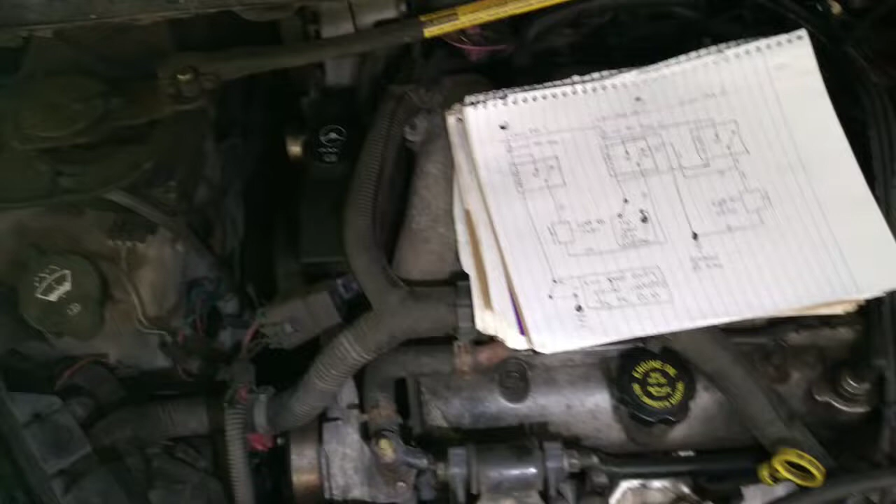Today I'm going to be going over the three relay cooling fans on a lot of GMs, some Fords, and even some Dodges. They use three relays: a main, and then two relays, one for each fan if it's a two fan system, to control the high and low speeds.

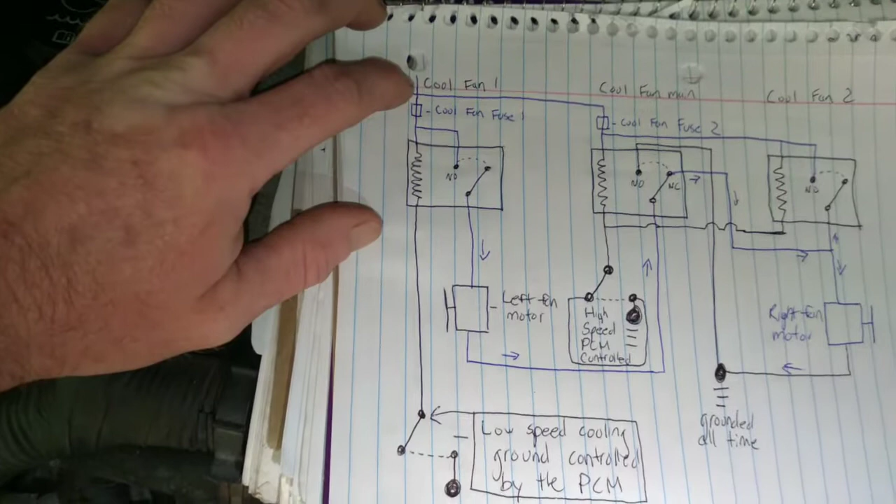I've actually drawn out a schematic about how this works, and I'm just going to be going over the low speed for right now, in case anybody has problems with that. I tried to draw all the positive up here in blue, and all of our grounds in black.

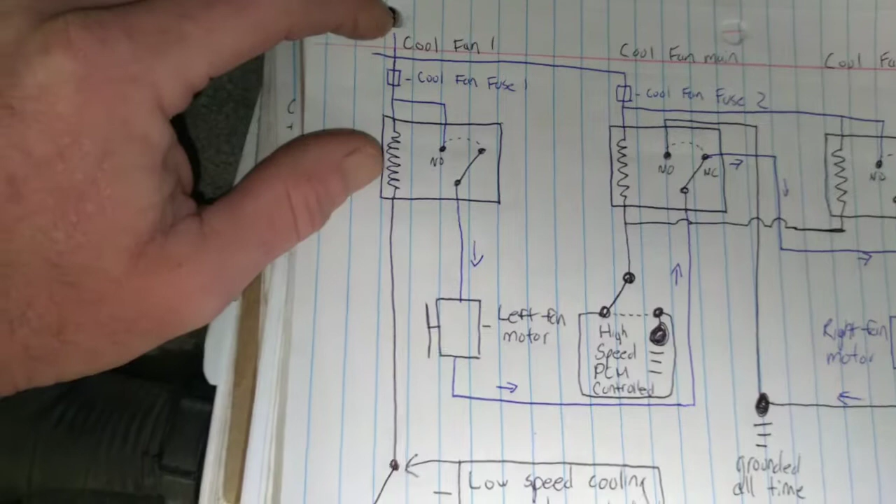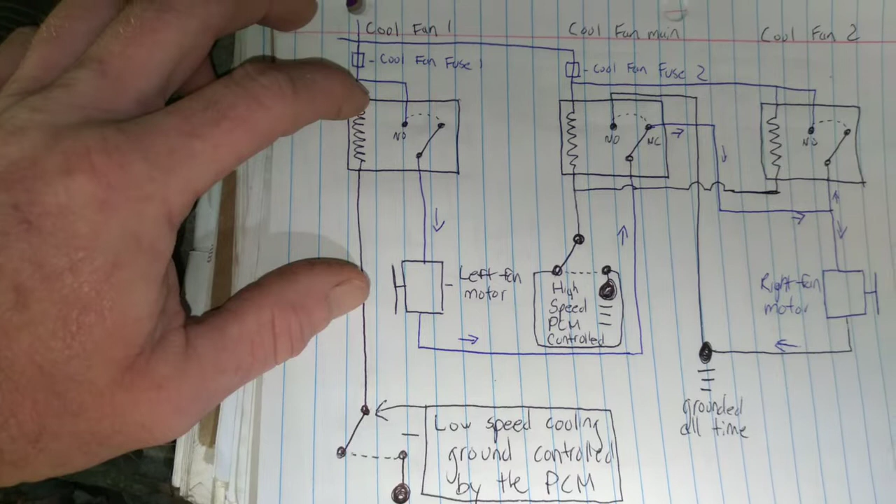I don't know how well it's showing up, but how this works is you got your power feed coming in, and it goes through two separate fuses. You'll have your cool fan fuse 1 and cool fan fuse 2. What it does is it will flow through the fuse if it's not popped.

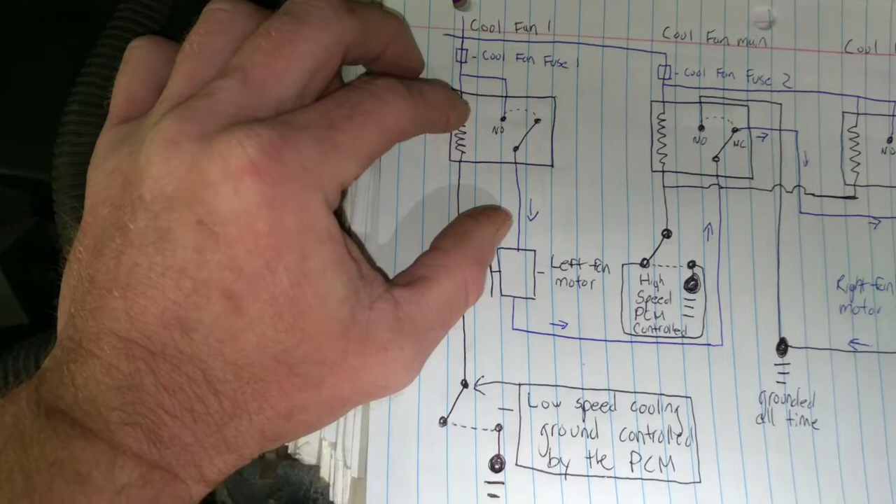For the low speed, you don't even have to have the cool fan fuse 2. It will go and it will flow. This is hot all the time. It will go into the coil side and into the normally open part of the relay.

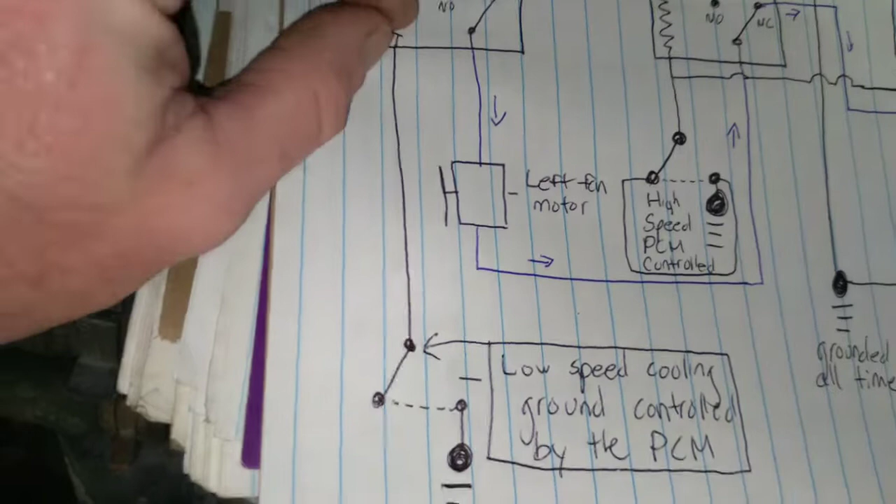The computer, the PCM, actually grounds this to turn it on, depending on if you've got the air conditioner turned on or if it reaches a certain temperature with the coolant sensor. It will close this, which then allows it to be grounded. Whenever this is grounded, it will enact this electromagnetic relay to snap this normally open position relay shut.

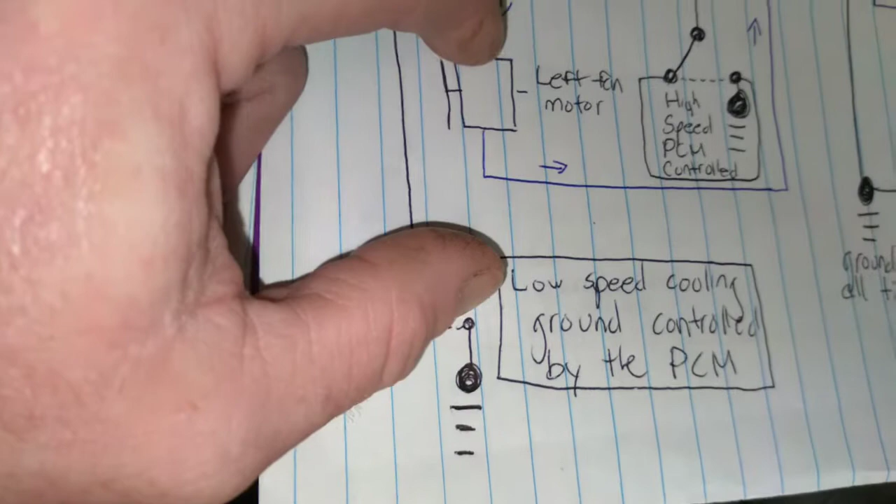So this is open all the time, and whenever it shuts, it allows the electricity, the 12 volts, to flow through it and come down and go into the left fan motor. It goes through the left fan motor, and instead of being grounded, it keeps on coming over and goes up, then into your main relay.

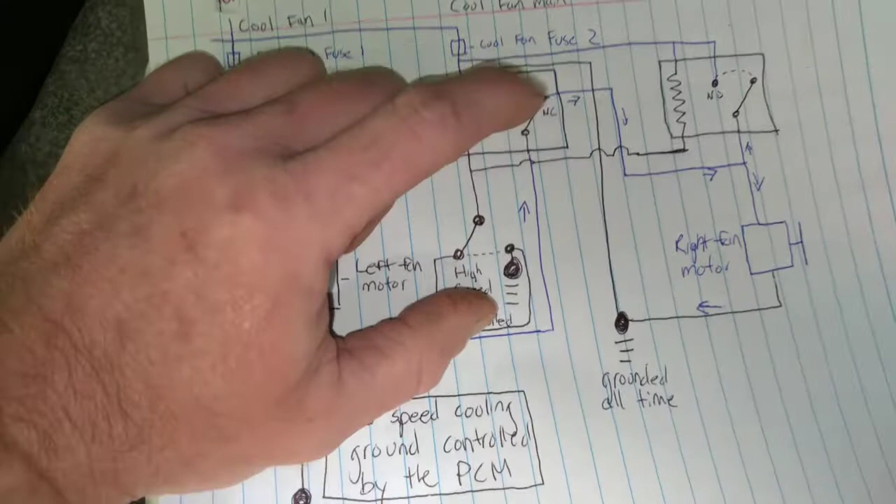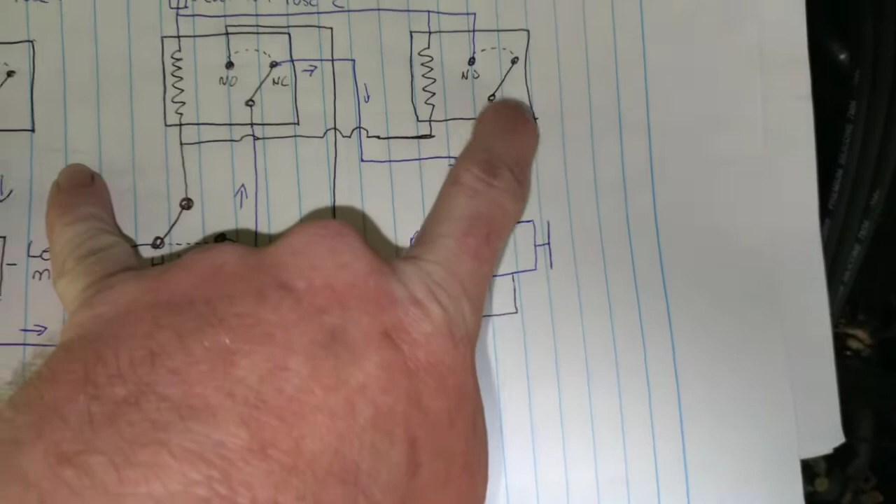Now, your main relay is a 5-pin relay. It has a normally closed and a normally open position. When this relay is not energized, the normally closed lets it flow through it, comes down, comes over, and makes it over here to your relay number 2, your fan relay 2.

And since it can't flow up and through this relay because it's open as well, it goes back down and into this second motor and then out into ground. So these motors are both wired in series, and they're each getting 6 volts apiece, which lets them run at half speed.

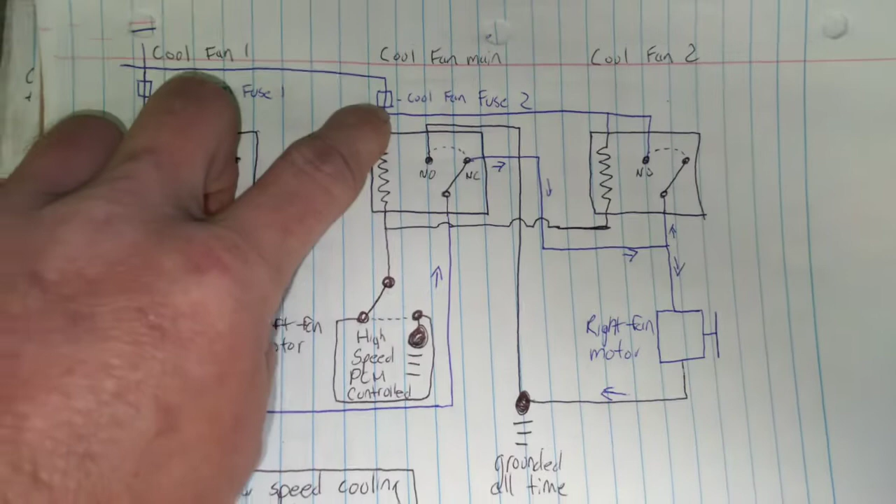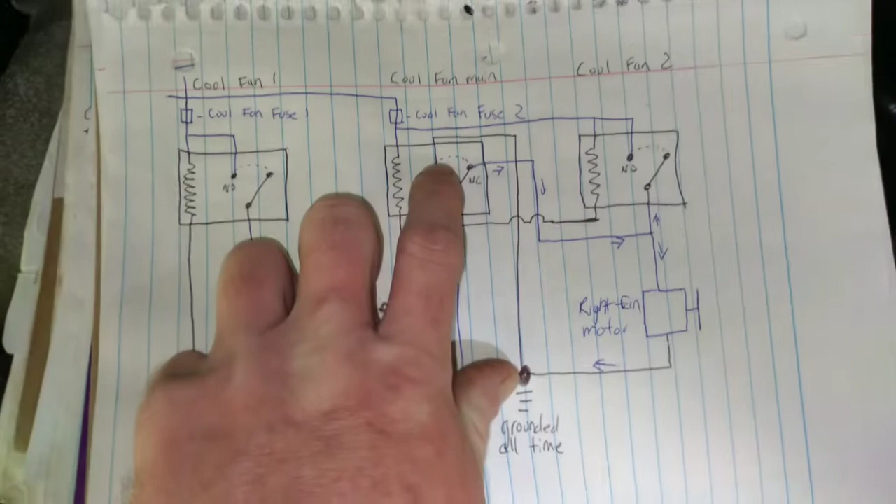So in order for this circuit to work right, you must have a path here. This fuse cannot be popped, it has to be in the vehicle. Over here, it doesn't matter if this fuse is popped or not, and it doesn't matter if relay number 2 is even in the vehicle. But what does matter is this relay, and it must be in the vehicle and in the normally closed position. If it's in the normally open position, then it will try to run at high speed.

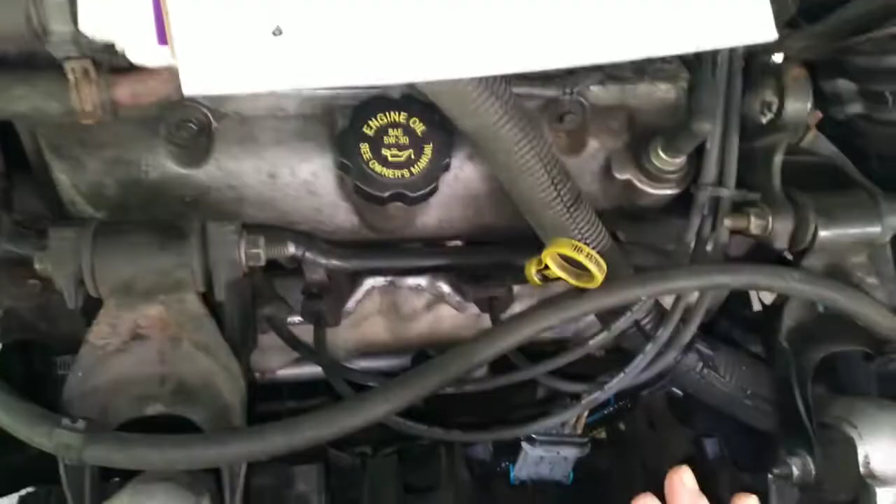But I'm not going to get into that in this video. We're just going to be doing a few simple checks with this and showing you how to troubleshoot it. Both fan motors should be running, and running at a low speed.

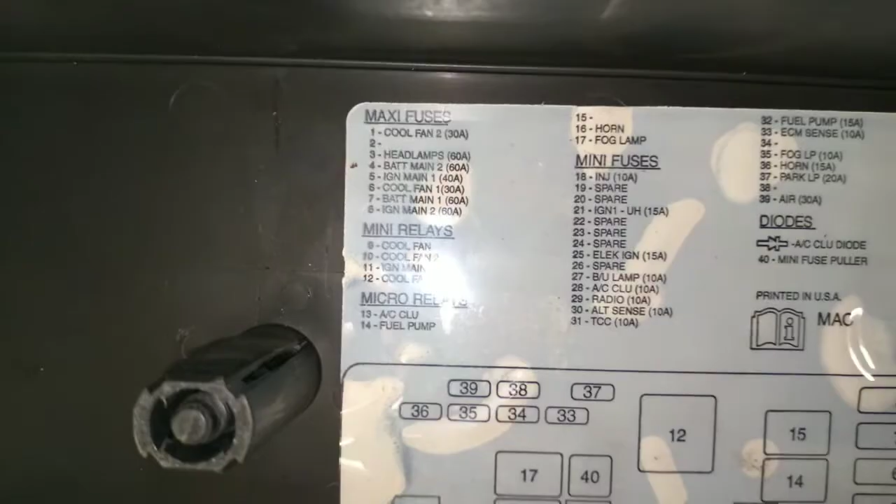How to check this is get you a test light, make sure you get on a good ground and that you keep that good ground. Then with the fuse box under the hood, you have a diagram, or should have. On that diagram, you have fuse number 1, which is all the way down here in the lower right corner, which would be your cool fan 2. That's this fuse here, the one I said didn't matter.

And number 6 is your cool fan 1, which is the one that does matter. It's also a 30 amp. So it's this fuse right here. Take your test light and make sure that that fuse isn't blown.

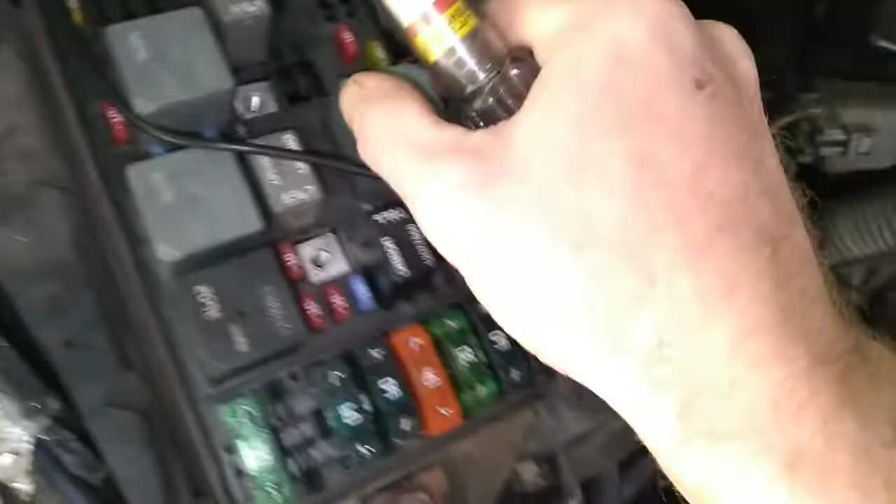Now, it has to go into this relay, and with this fuse removed, you won't have your coil side 12 volts, or the 12 volts on the normally open side of the relay. These relays and how they work is they crisscross. Your coil side, I believe, is 85 and 86. That's the side that draws in the contacts in this relay.

85 and 86 draws 30 into 87. So whenever this is energized, 30 will be hot, and then it will get drawn into 87, and that allows the voltage to flow through just like a light switch.

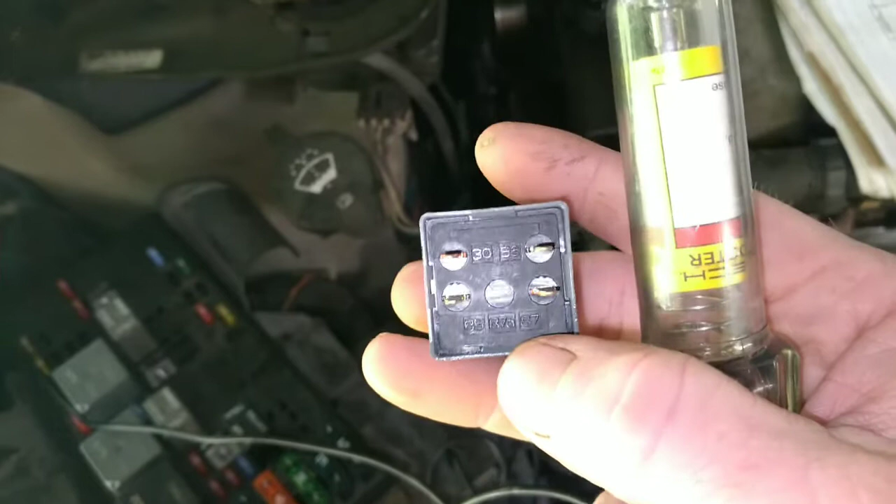You'll look on the bottom of this, and it's got 4 pins, but it actually has 5 different terminal locations written on it. The 86 and 85 is right here. And I was actually wrong - 85 and 86 is this side and this side up here. So this side and this side here is your switch side.

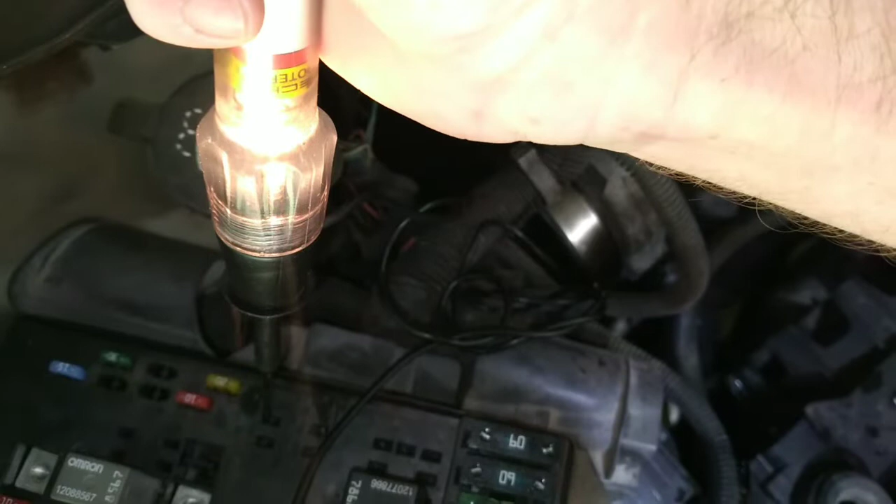So with the fuse in the vehicle, and we've already checked the fuse, we'll go ahead and check this coil side out and see how we got power on one side. The other side is grounded by the PCM. It's not being grounded right now, so right now it's just an open circuit.

But with the vehicle running, and like I was saying about the air conditioner and the coolant sensor, it will actually ground it to here, and then that allows this relay to close and make these contacts close as well. But you should have power on this, and then to check your switch side to see if you're getting power there as well.

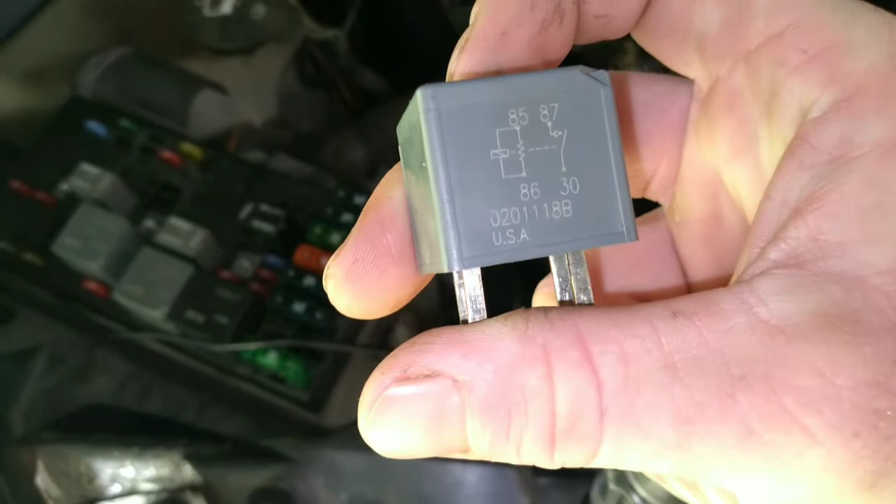Because that fuse powers both sides, it should be, yeah, it's right down here, so they're right next to one another. So this side right here has the power on it, and what it does is whenever that relay closes, it sends the power through here, and that's the power going to your fans.

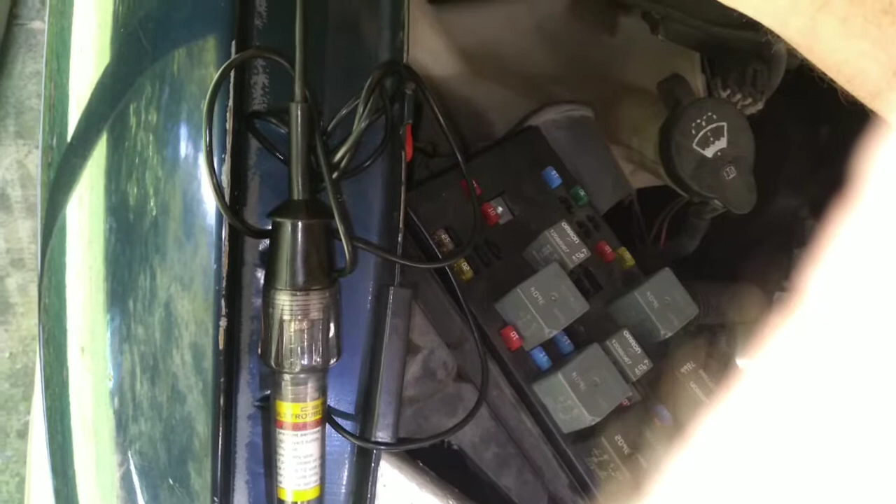And I can actually demonstrate that for you with a couple of test pins. You can use a paper clip, whatever, just make sure they're not too big to go down in these little slots, and you do not want to spread these open or cause them to be pushed down in, because if you do, your relay's not going to make a good connection and you'll run into problems. These fuse boxes are not cheap either.

So let's look at our relay one more time and be very careful whenever you're doing this. You do not want to ground the coil side - you can damage the PCM. Try to get it focused. 85 and 86.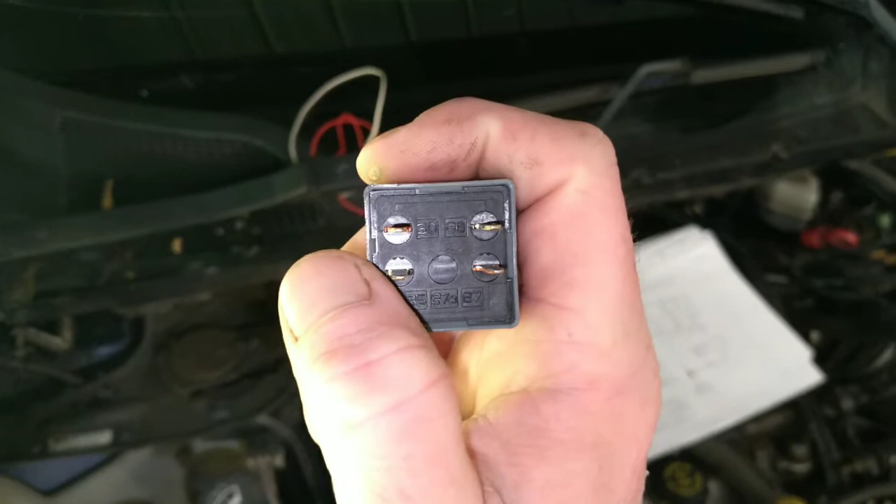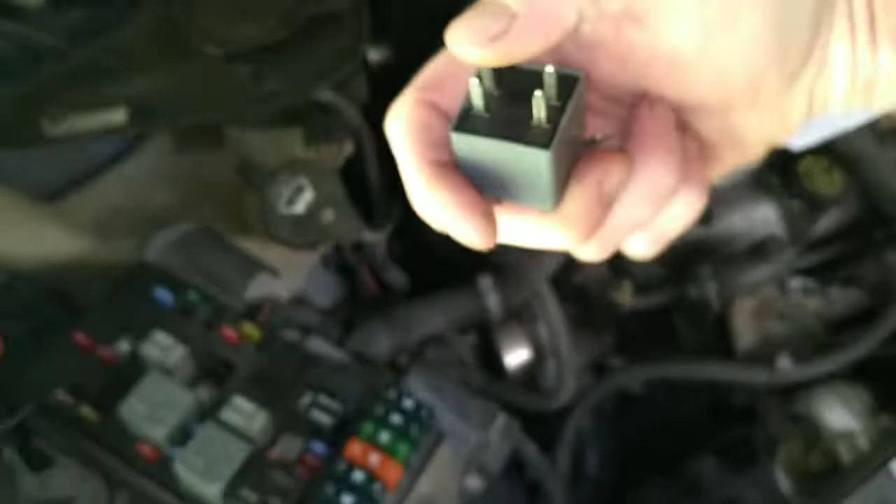And it doesn't matter which way you put this relay in, because if you flip it over, 85 and 86 is right here and right here, right? So when you flip it over, you still got 85 and 86 on the same side. So 85 and 86 are these two terminals, and 30 and 87 are these two, right here, and then shove it in, and up here.

Just to test this, get you a jumper wire. Just make sure it's not going to fall out and ground on anything. And the same thing over here. And they should both kick on and run.

Now the problem that I was having was I had one fan coming on, and it was the smaller fan over here. And I had to end up chopping these wires. I'm going to fix this a little better later on, but for now, I had to end up chopping these wires.

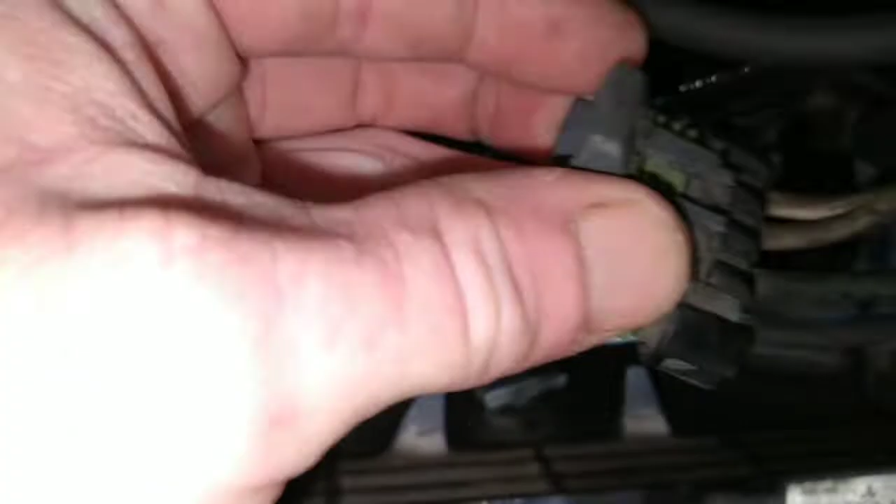Give me just a second to get this connector loose, it's a little rough to do sometimes. You pull that out, and then there's a little tab here, and it's going to take both hands to pull that out. You pull up on this, and then it slides right out. See how it clips down over this, and then that little blue lock tab fits in that little slot, and that just keeps everything pushed together in case this ever was to get loose.

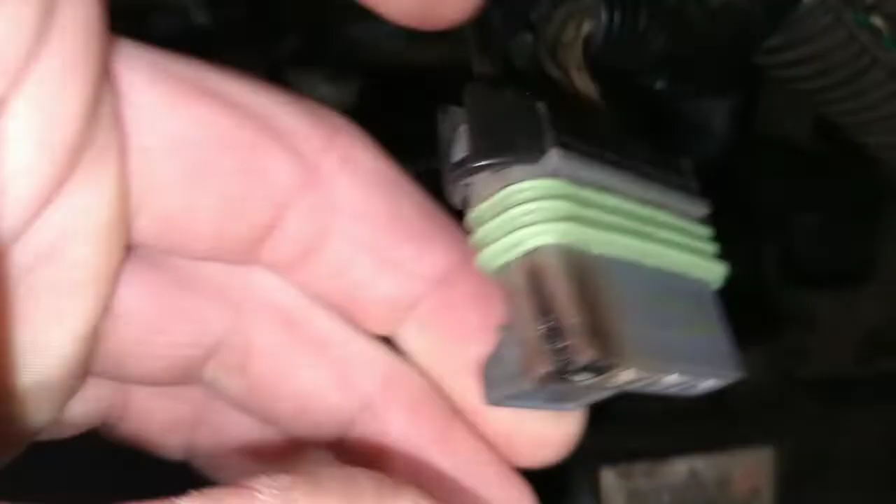But see what happened now? What happened was this actually got loose, and when it got loose, the fan would kick on and run sometimes, and then sometimes it wouldn't. And I didn't know at the time that there was actually something wrong.

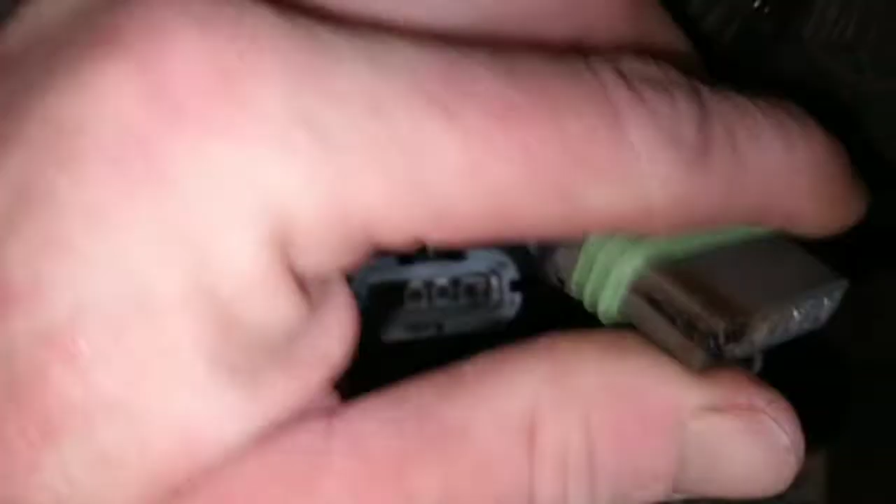I've never looked at the schematic of how the fan motors work on this. I know that this fan over here would kick on and run, and then this one over here would kick on and run with this one. But then this one would kick back up, and the way it was doing it, it looked like it was supposed to do it that way.

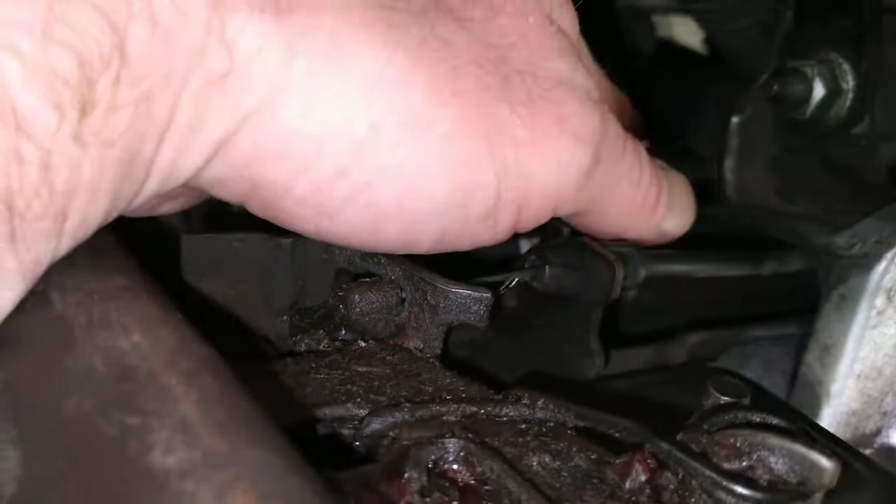And finally, once it burnt on it too, then all I had was this little fan over here, and it was just running in high speed only. So my motor was already overheating by the time this fan would kick on, and it wasn't enough to cool it off. I actually had to pull off to the side of the road 2 or 3 times to get it cooled off to where I wouldn't have any problems with the blown head gasket or anything.

And I don't know if you guys know anything about the 3.1 and 3.4 engines GM built, but they're notorious for head gasket leaks, intake manifold gasket leaks. So I definitely did not want to overheat this.

The way this circuit works, for these fans to both run and run right, they must both have a good connection. To run in low speed, they run in series like I was showing you earlier. If you don't have a path to get it through this motor and get it to ground, then this one over here is not going to run either. They're both going to not run, and it's going to just keep heating up until you hit the high speed where they both separate out and both get the 12 volts they need.

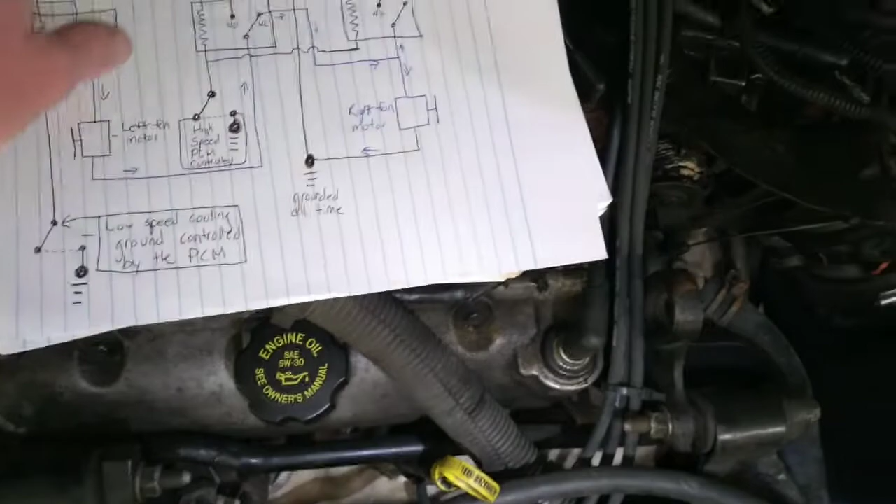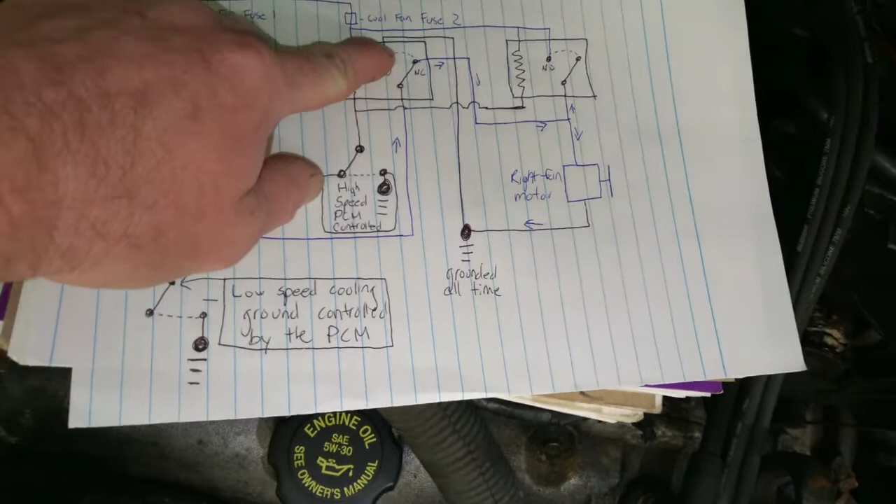Whenever it goes into high speed, all three of these relays close. So it's going to flip here, and flip here. When it does that, you are getting 12 volts up, but instead of it going over to here, it's going to go on up to here, and it's automatically getting grounded. So this one is getting its own 12 volts, and this one over here is getting its closed, so it's going to run through and down, and it's got its ground as well — that's your high speed.

And the computer tells it to run at low speed, different temperature ranges for different vehicles. I think low speed on this one is 220 or 218, something like that. And then high speed is actually 230, which is way too high anyways.

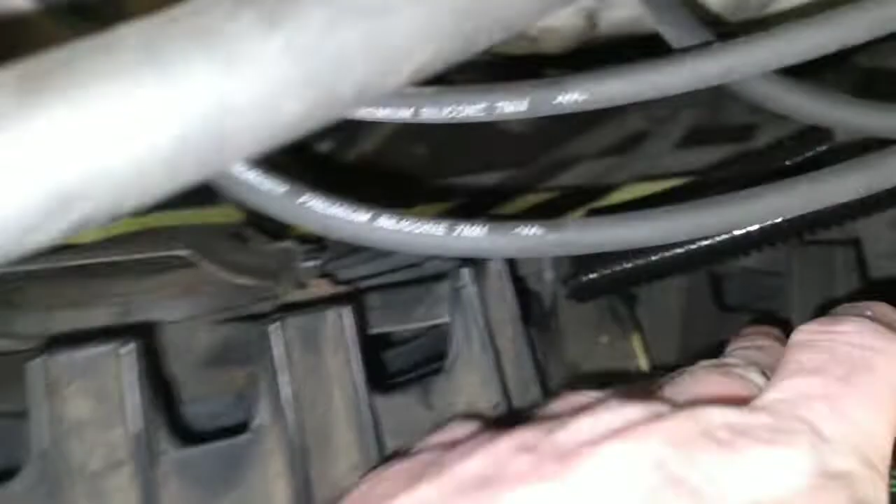Bigger fan. And then these two right here are for that smaller fan. They're gray and white, and they go down into this connector. But then they each have their own connectors right on the motor. Let's see if I can get that off.

You may need to check there as well, is what I was going to say. And just be really careful with these clips — they're exposed to a lot of heat, and on this van, a lot of age.

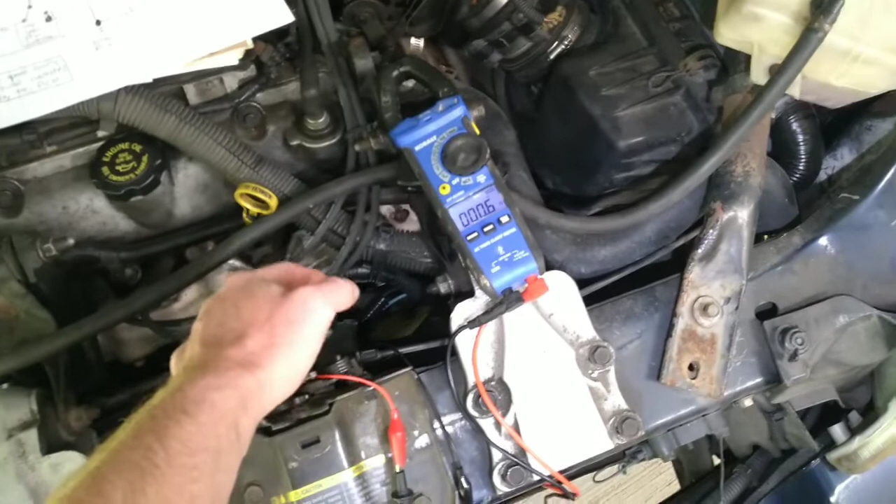I read about 1 ohm. But as you can see with the smaller motor, I was reading about 0.9 to 1 to 1.1 ohms. On the larger motor, I'm reading 0.6 ohms now. And it was reading 3 ohms with that bad pin on there — it wouldn't allow it to work.

But if you've got a fan motor on either side, depending on which motor it is, not working will cause the other one not to work as well, depending on what speed it's running at. With the left one — the smaller one over here, I know it's to my right, but if you're inside the vehicle, it's the left — if the left motor is working but the right one is not, like I had, you will not have a low speed if you have a problem at the right one, because you just don't have a path for it to get to ground. It will have to kick to high speed, and that relay will have to close, and then it will go to ground.

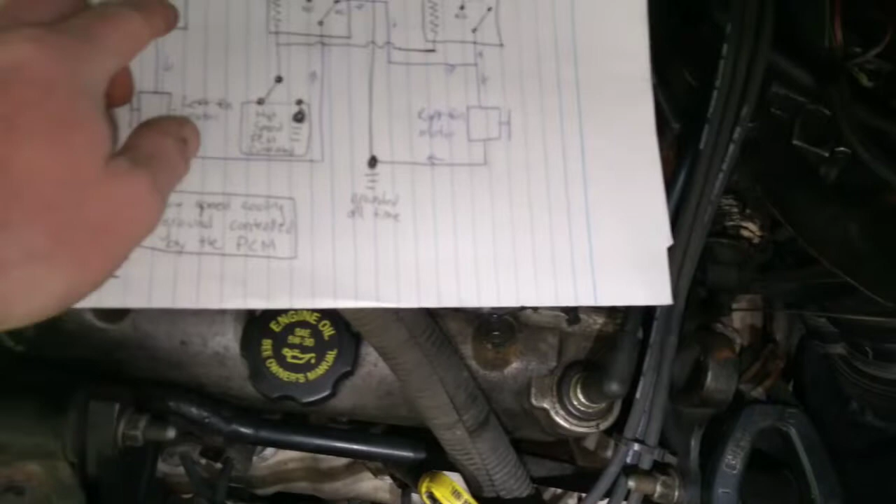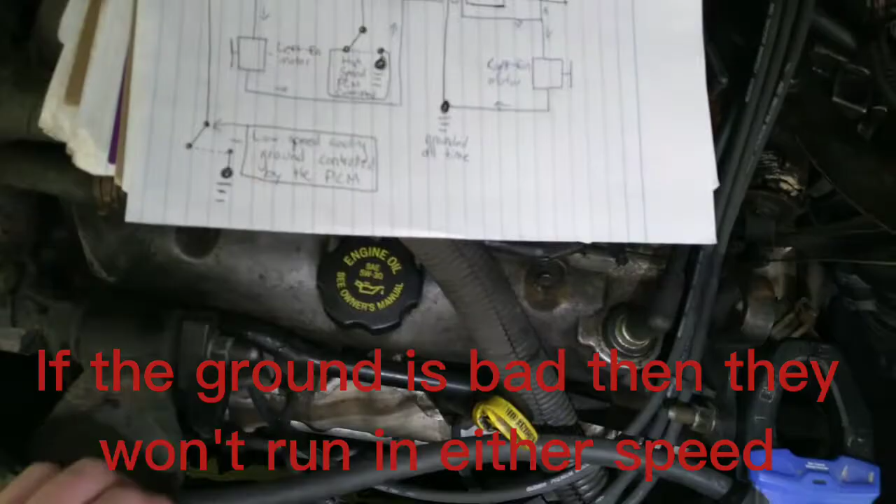Other way around now: if this fan's working and this one is not, depending on what your problem is — whether it's wiring right through here between this relay and that relay, or at the fan itself — you're not going to get the 12 volts divided by 2. So you're not going to get power down to this motor; it's not going to work. Now, once the high speed kicks in, it will go to ground. So if you're having problems with one or the other, you're not going to have a low speed. All you'll have would be a high speed.

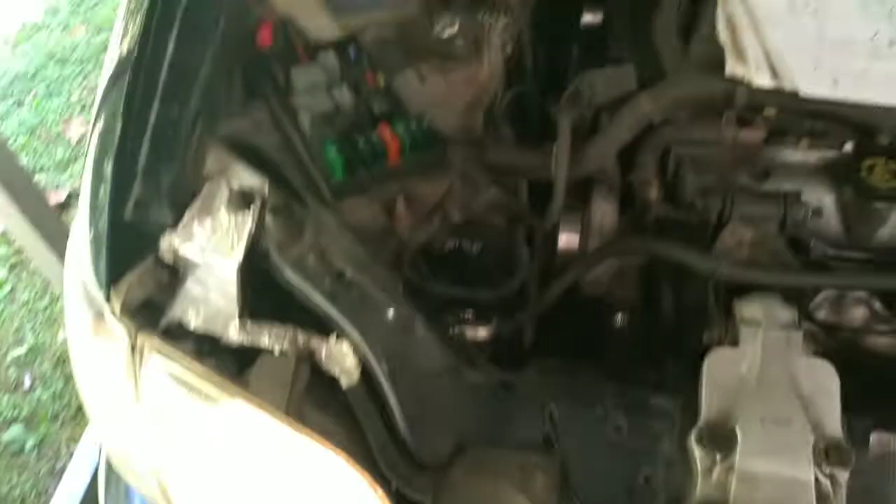I'm going to go ahead and start the vehicle, and I'm going to show you guys how to check these fan motors, both. Just turn your AC all the way up. If you got back controls, if you're driving a van, turn it on too. And then take your test lights, make sure you got a good ground. And then once the pressure gets high enough...

See how we got the lights lighting up on this side. Take your test lights now and put it on the other side. And you'll have your other as well.

I'm going to let this come off some — I spilled a little bit of antifreeze earlier and had to rinse it, and it's pretty strong. But you saw how I plugged the test light up to the positive and then got on the white wire, and it lit up as well. Well, that lets you know that your ground is coming.

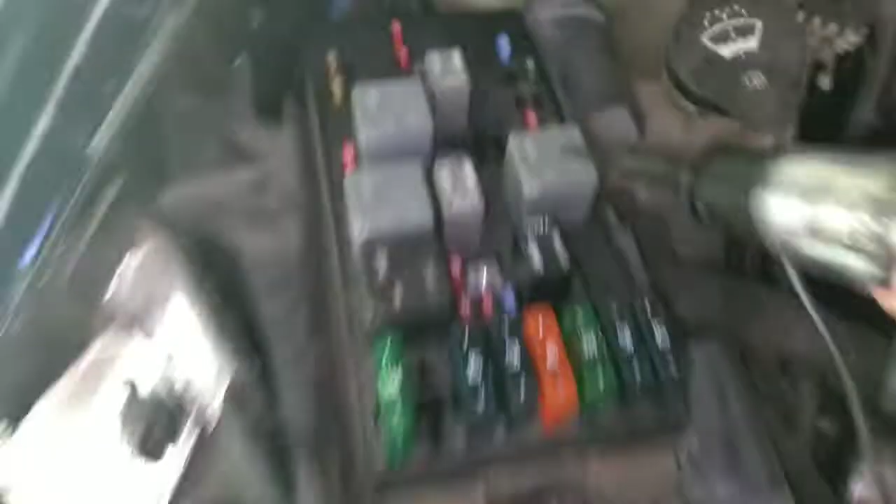That lets you know that your ground is good. See how it's grounded all the time? Your ground is good to go onto this one. And then this lets you know that your power feed is coming from this relay. The cooling fan relay 1 is good as well. So we got a power and we got a ground.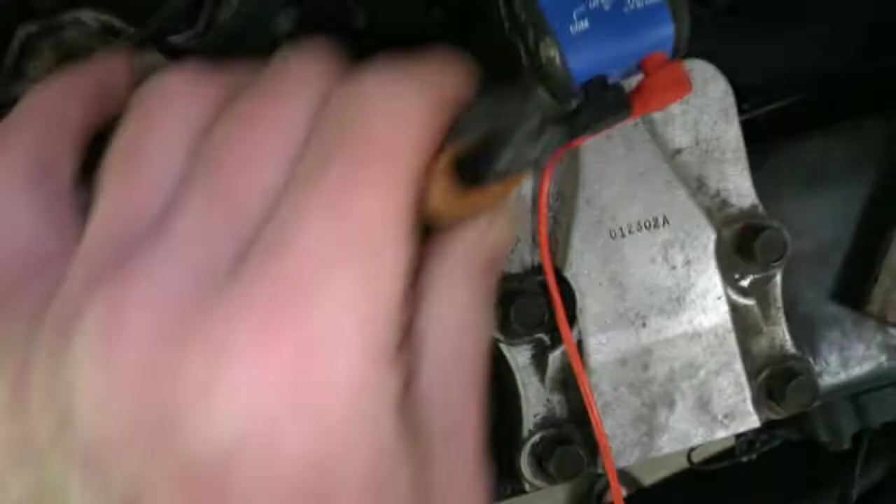So there's no other reason this motor shouldn't be working. Now as for the other one, remember I had to chop these two wires, but we can still test it even though I had to use butt connectors and hook it up to this. We can still test it right here on this plug as well. You can do it on the other one just to make sure you don't have a problem from here, or actually from here down to there as well, which I don't, but it's really good to show you guys both ways of how to test these, because if you got power going to it, then you should have a motor running.

I think that stuff is just about evaporated off. Now I'm still on the power side, so what we're going to do on this one is check for the ground first this time, then we'll check for our hot 12 volts. We'll go ahead and turn it back on and leave the AC turned up.

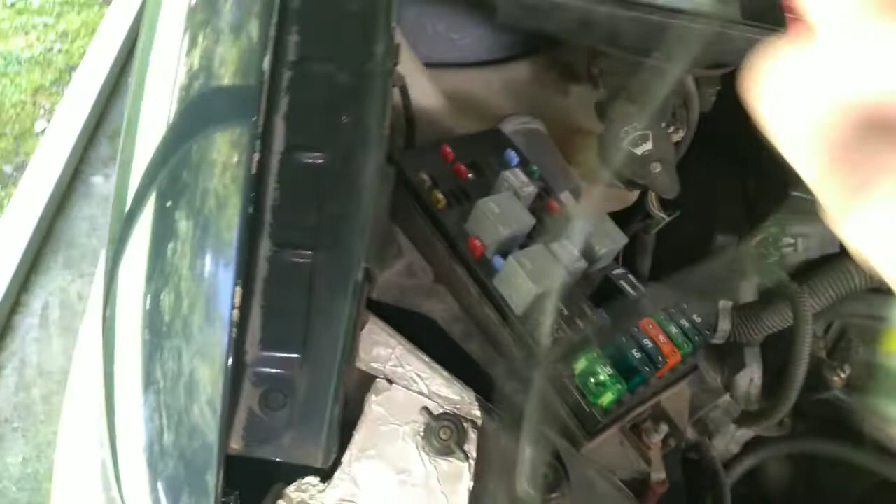And it shouldn't take it long with the AC turned on because the pressure builds up pretty quickly. See how we've already got our ground. We're going to go ahead and see if we got our 12 volt feed now. We're hooked onto the ground. Test lights are lighting up. So on this side, and there it is. See how we lit up now?

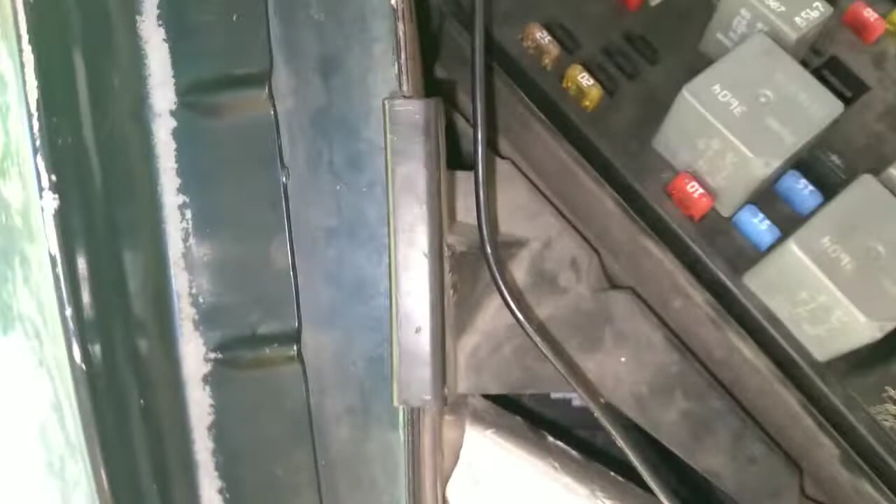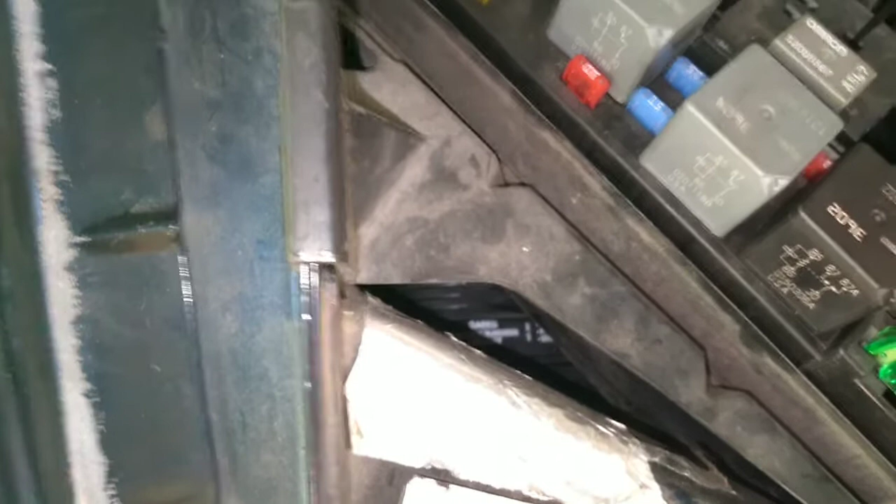I'm going to go ahead and turn this back off. Well, actually, before I go ahead and turn that back off, we'll go ahead. Remember 85 and 86? Well, on one side of this, we should have our ground. So we'll hook the test light up. And there's our ground. Remember, 85 and 86 being our cold side. 85 is down here in the corner.

Earlier we determined this side is our hot all the time on both the cold side and the actual switch side of the relay itself. So this side here, you see that lets me know that my ground coming from the PCM to this relay is good, and it clicked as soon as I put it in. We'll go ahead and check this. There's our ground on our main. So we know that the PCM is commanding the high speed on as well.

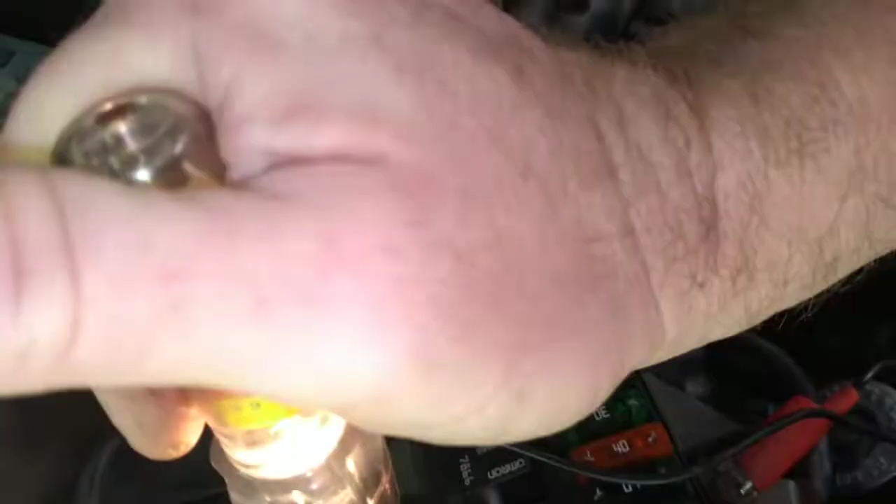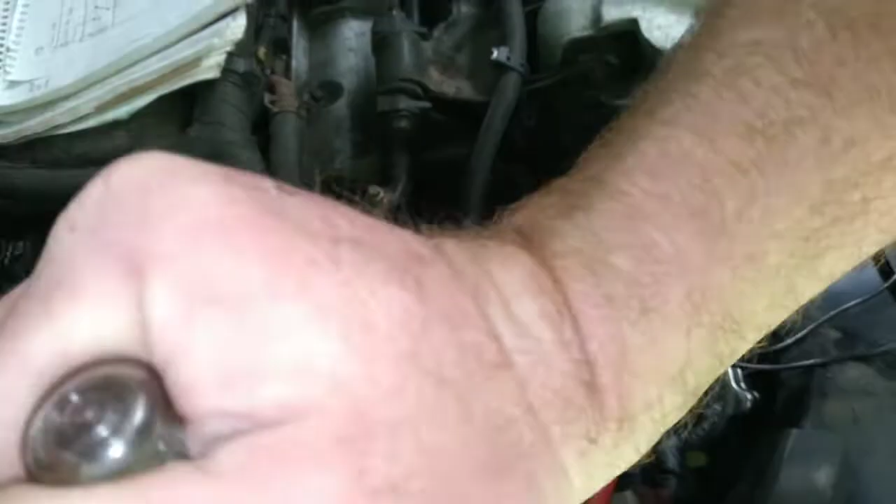And we'll check this. And we got a ground right there. And the way this is, that is 86. If you flip it over, 86 is in this upper left corner. So the high speed is definitely being commanded on all three of these.

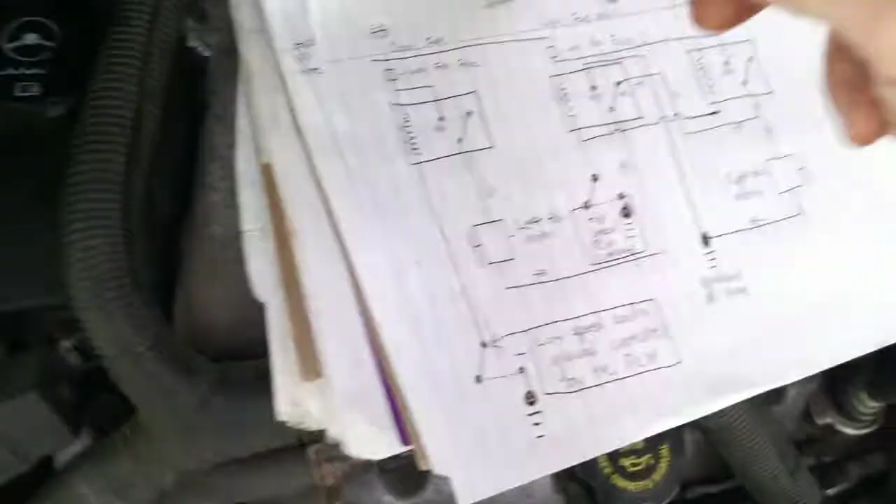We checked it and we checked the feed for the low speed. Make sure you're plugged back in down here. And remember earlier when I checked this one and it was 0.6, and I checked this one and it was about 1 to 1.1. Well, they're wired in series, and what you can do is go from here all the way through into this ground. So we got our ground hooked up here, and just make sure you get on the right pin.

Right here should be our path. It'd either be this side or this side, so whichever side you got continuity on. And that lets you know that you have ohms and continuity from your ground through both motors, all this wiring, all the way back to here. 0.6 and 1.1, we have no extra added resistance to it.

Now you can check this other side. It's just going to show you the second fan itself. And that's just your one fan to ground.

Now, in order for you to be able to check, we've already went ahead and checked both motors together on the low speed. We checked the cooling fan, the big fan, on high speed. Now, in order for us to be able to check the little one on the high speed, we will remove this relay as well.

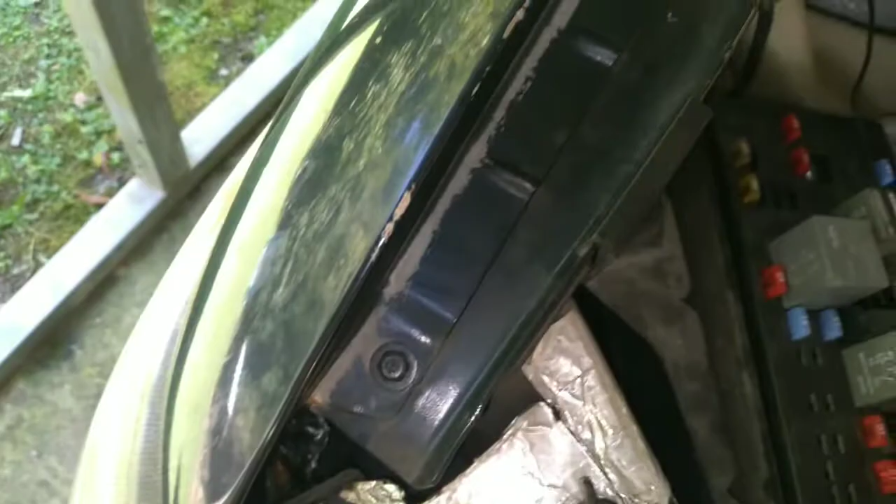What you will have to do is close that normally open connection. So we'll close it from here to here. Leave this relay out because you don't want to read both of them together. You want to just read the one by itself.

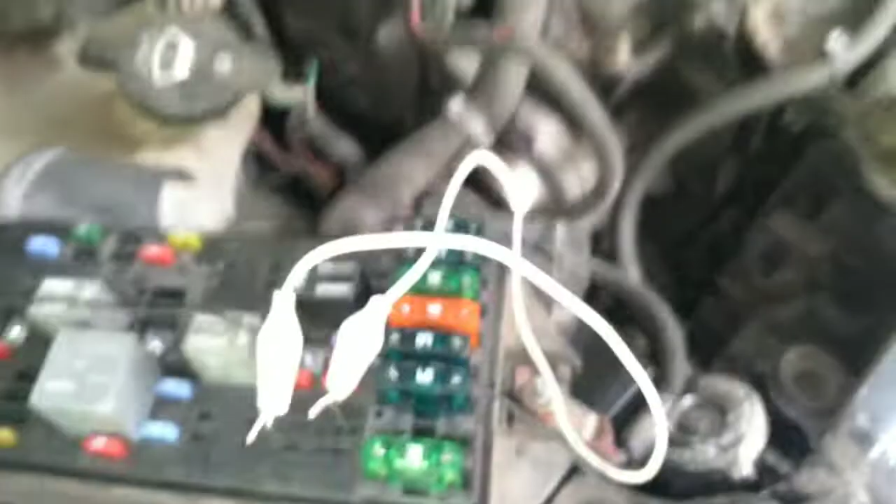What you'll do is you'll be right here. You'll go through and go up this way. So instead of going through here and going through the other motor, you'll go up to here, over, and then down to our ground. So we got our connection there. We're going to go back up here to right here. I can get my hand up off it, make sure everything's...

All right, now everything's balanced out. See, we got our 1.1.